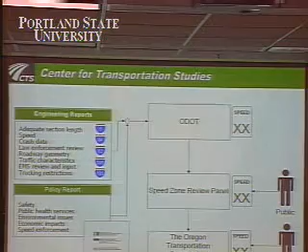So the law that the legislature passed, essentially from the time the law was passed till ODOT did the second rulemaking, there was no maximum speed on the interstate, so ODOT had to pass some temporary speed orders. So the process that they came up with was this: the department was going to do the engineering investigations of the sections of the highway.

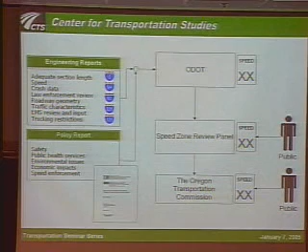So they would look at the crash performance, they would measure the existing speeds of vehicles on the roadway, they would get input from law enforcement. They divided up the interstates into about 40 sections of varying lengths, depending on consistent geometry. They would get input from law enforcement, from emergency services, and they would compile reports about each section.

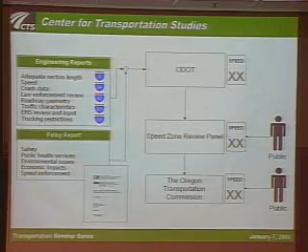And what they felt they couldn't do on a section-by-section basis was write an overall system impact of what would happen to the crash experience and the safety impact. So would crashes increase? Would fatalities increase? What would be the impacts to the public health system? Are there any environmental issues associated with raising the speed? Are there travel time benefits? And is there adequate enforcement from the Oregon State Police to enforce a higher speed?

So what they decided to do was require a policy report, and that's where PSU came in. PSU teamed with Oregon Health and Science University and a local transportation engineering consultant, Kittelson & Associates, to produce this policy report, a system-wide impact. So up here in the first box, ODOT would take those two reports. They would make a recommendation on what the speed should be on each section.

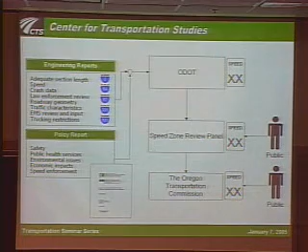They would present that to a panel called the Speed Zone Review Panel, which has representatives of cities, counties, ODOT, and a citizen member. They would review that, taking into account the engineering report, the policy report and ODOT's recommendations, and make a final recommendation to the Oregon Transportation Commission, which is appointed by the governor, and they would make the final rule on what the speed should be. So that's what the process was, and now I'll walk you through what our report found.

So over the holidays, I was reading Portland Monthly magazine, and buried at the bottom of some page were some historical statutes in the city of Portland. An early Portland speed limit is nobody should ride their horse, mule, or beasts of burden at any speed greater than 6 miles an hour. And this was in 1868. So this shows that in transportation, speed limits have always been of interest to people, limiting the speed of travel as a trade-off between efficiency, mobility, and safety.

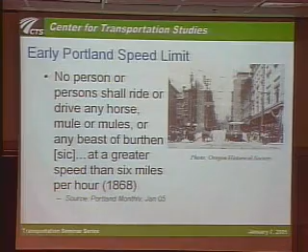So just historical context for interstate speeds: most all speed limits are set by the local government agency that operates the roadway. The federal government has only gotten involved twice, once in World War II as an emergency measure, and second in a period from 1974 to 1995 where there was a national maximum speed limit brought on in 1974 by the energy crisis. So they imposed a 55-mile-an-hour maximum speed on all roadways, including interstates, and they linked that to federal highway funds.

So it's not quite as bad, and Matt Lasky will notice these images because he helped me make them and did the research on where all the speed limits were. But for light vehicles, Oregon is the only western state that still has a 65-mile-an-hour maximum speed limit. Washington and California both have 70. You see a big piece of the western United States with maximum speeds of 75 miles an hour. Down in the south at 70, and then the more populated Northeast and Iowa also have 65. So that's the current status as of September. I don't think anything has changed since then, but those are the maximum speeds on interstates.

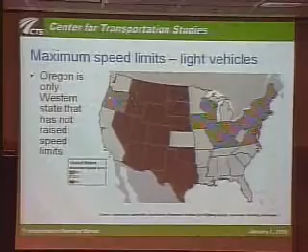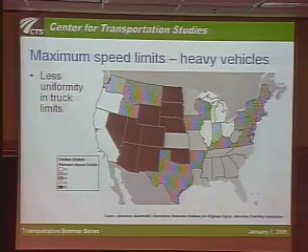There is less uniformity for truck speeds, and one of the key issues in the report was talking about what the safety impacts of having differential speeds for cars and trucks are. So just to let you know, some states impose lower maximum limits on trucks than they do on cars. And I'll have some more slides later.

So our report basically sought to answer these general questions, and I'll lay them out in how we came to some of our conclusions. One, will vehicle speeds increase if you change the signs from 65 to 70 miles an hour? Two, what could you expect in terms of safety and health impacts? Are different car and truck speed limits safe? That was a pretty significant debate. Are there any economic benefits to raising the speed limits? And what might you expect in terms of environmental impacts?

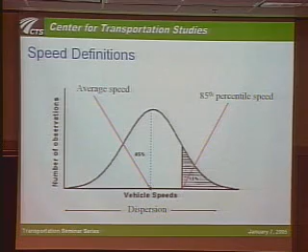So it's traditionally been a good speed to pick as a balance between enforcement and safety. The idea is that most drivers choose a safe and reasonable speed at which to operate most times, and that if you set your speed limit near the 85th percentile speed, most drivers will be in compliance with the speed limit, and you'll have a small proportion in excess of the posted speed limit. It makes it a little bit easier for enforcement and puts some trust in the driver selecting speeds.

So the first question is, will speeds increase? When you change the signs, you'd expect speeds to increase. But currently, even though the maximum posted speed is 65 miles an hour, the average speed is 67 miles an hour, and the 85th percentile speed on most of the rural interstate sections is 70 to 74 miles an hour. So people are well above the posted speeds already. So some of the arguments were, let's just change the signs because people are already traveling above that anyways, and we probably wouldn't expect to see any changes in speed.

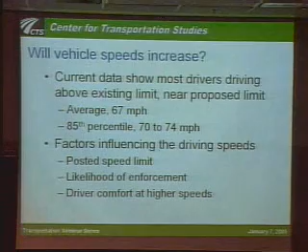But the factors influencing the speeds people choose to drive are, one, the posted speed limit, two, the likelihood of enforcement, and their level of comfort at higher speeds. So we looked at states that changed their speeds from 65 to 70, and this is only a snapshot of them, but in all cases, over time, speeds have continued to increase after the signs changed, even if speeds were above 65 miles an hour already. So all previous experience indicates that speeds are still going to increase when you change the signs.

Probably our most comparable state would be Washington. They have nearly double the trooper presence on their interstate highways. What this also doesn't show is that Oregon state troopers have responsibilities besides traffic enforcement. They do fish and wildlife. They do criminal enforcement. In Washington, Idaho and some other states, their duties are specifically traffic enforcement only. So if you took that into account, the Oregon numbers show even less of a presence. And you probably know from your practical experience driving Oregon's interstates that the trooper presence on the interstate system is not all that great.

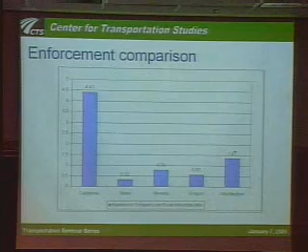So there were some other issues on whether, if you raise speeds on interstates, it would propagate to the rest of the system: will drivers become accustomed to driving at higher speeds, and would that propagate to the rest of the system and cause problems?

We looked at some of the research, and it's true that there is a driver speed adaptation if you drive at higher speeds. If you exit an interstate to another facility, probably for about 6 or 7 minutes, your perception of your speed is less than what it actually is. So there will be some spillover effect on adjacent roadways where people probably will drive a little bit faster.

And especially on roadways that aren't interstates, like US 26, that wasn't subject to change, or Oregon 22 out of Salem, that look like interstates, but the speed wouldn't be raised. People would likely drive those like the speed had been increased.

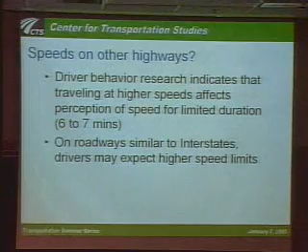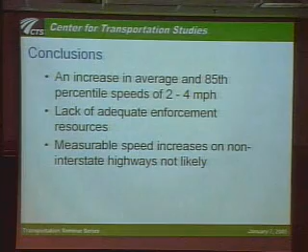So our conclusions were that the speeds would likely increase 2 to 4 miles an hour on average, that there was a lack of adequate enforcement resources, and that was recognized by many participants in the process. But we didn't expect a system-wide overall increase in vehicle speeds.

So the big question was what would be the impact on safety? Would there be a change in the number of crashes, in fatalities, and injuries? And it's a very difficult question to get at, even though there's been a lot of somewhat rigorous studies on the issue. It's still not very conclusive.

So you can look at it in 3 ways. 1, how speed physically influences crashes. 2, you can look at studies that have specifically looked at crash causation and see what impact speed has on that. And lastly, you can look at the observational studies of speed limit changes on crash frequency, of which there have been quite a number.

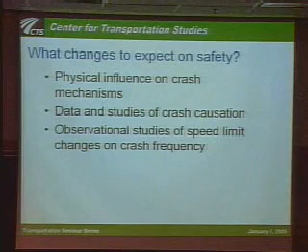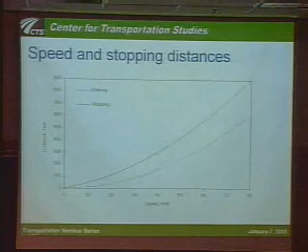So this graph shows the AASHTO design considerations for stopping distance. It's for wet pavements with some assumptions in perception reaction time. So not anything earth-shattering, but as speed increases, braking distance increases with the square of velocity. So an 8% increase in speed from 65 to 70 miles an hour would increase stopping distance by 13%. So it's not a linear relationship.

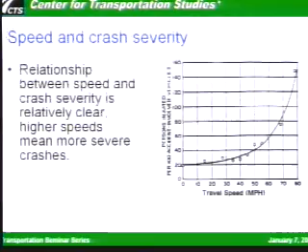And speed also has influence on your maneuvering. It takes away time to avoid obstacles or other collisions. So speed definitely does have an impact in those two things that would be involved in crashes. Also undisputable is that crashes at higher speeds are almost always more severe.

The relationship has been demonstrated in observational and empirical studies and also medical studies, that the higher vehicle speed before the point of impact almost always results in more severe collisions.

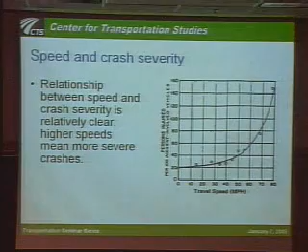So speed as a causal factor in crashes: looking at raw data sets, a lot of the focus is on fatal crashes just because the data for those crashes is typically more dependable, and there has been a police investigation of the crash, whereas for some of the other crashes, the data is either from citizens or there's not as much time spent on the investigation.

So NHTSA, which is the National Highway Traffic Safety Administration, compiles nationwide fatal accident statistics, and has 31% of Oregon fatal crashes having speed as a causal factor. ODOT has it a little higher, at 52%, and that's just due to different definitions of when speed was a causal factor. The NHTSA definition is a little bit more rigorous.

If you look at all crashes, there was a study done in the late 70s by Treat et al., called the Tri-Level Indiana Study. It's probably still referred to as one of the most comprehensive studies of crash causation mechanisms.

They looked at crashes in 3 levels. One, just looking at the crash records. One was a more in-depth team review, and a 3rd level with a complete field investigation with police officers, psychologists, engineers, a whole trained team of people to determine the causes of those crashes.

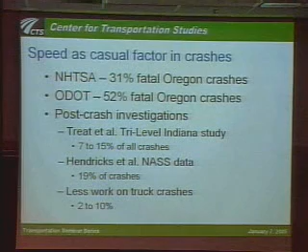So now, looking at the risk for an individual driver, what speed does to their chance of involvement in a crash. Most people, and maybe I'm guilty of it as well, I'm sure I am, exceed the speed limit. But it's hard for you to measure the incremental risk of your own exceeding the speed limit. But there have been quite a few studies that have looked at the increased risk of exceeding the average speed of traffic.

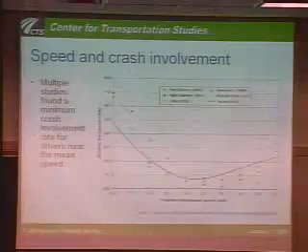But they all show the same, where here in the middle of the graph is the average speed of traffic, and your risk of involvement in a crash increases both on being slower than the average speed of traffic and on being above it. This gray line is a completely theoretical model by Hauer based on two-lane roadways and overtaking. So you can get the idea that if all vehicles are traveling at the same speed, there's less chance for interaction, so there's less chance for a crash.

So a lot of these higher points here on the left side, these studies didn't take turning vehicles out of their analysis. So that's why it looks like you're really worse off going much slower than the average speed of traffic, your risk goes way up. Some of these studies were flawed in the number of crashes they included.

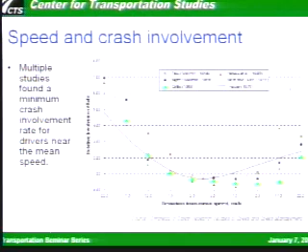So there's some debate about the quality of all of these studies, both ones that show increases and ones that show decreases. I left a few that showed some other significant decreases off because they were very poor. But almost all studies have shown an increase in the number of fatal crashes after speed changes.

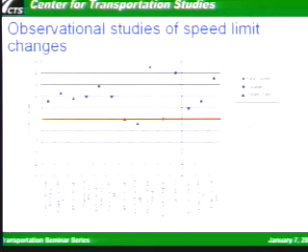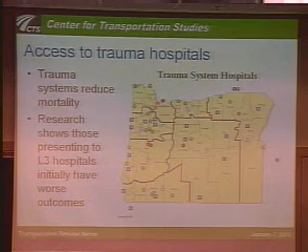And the research shows that if you present first to one of these lower level trauma hospitals, there's significant delays in getting you transported to a higher quality facility. And there are definitely significant health outcomes of presenting first to a lower level facility. So if you're in an interstate crash in some rural location and they transfer you to a lower level trauma facility, your outcomes are going to be worse than if you were transported to a level 1 facility. So much of the state is not covered by quick access to a high level trauma system.

So lastly, in this safety section, talking about the difference in truck and car limits. There's 2 states that have a 15-mile-an-hour difference between truck and car maximum speed limits. California and Michigan both have 55-mile-an-hour maximums for trucks and 70 for cars. And 6 states have 10-mile-an-hour differences, like Oregon 65-55 or 70-60, and a few have 5-mile-an-hour differences.

So what would be the benefits of having lower speed limits for trucks? So kind of 2 arguments for and against. One, the trucks are heavy. They require more stopping distance. They present significantly more energy in collisions. And if you looked at collisions between cars and trucks, the occupant of the passenger vehicle, like 80% of the time, is the one that sustains the injuries. So the rationale for lowering truck limits is to keep truck speeds slower.

And then the argument against that is that different truck speeds create conflicts in the traffic stream, so it introduces more opportunities for collisions. And then there's an economic cost to keeping your trucks at slower speeds. So the research wasn't really quite conclusive on this topic. The one thing it did point out is that they are effective at keeping truck speeds lower, but you need at least a 10-mile-an-hour difference to have any kind of effect on the observed speed of trucks.

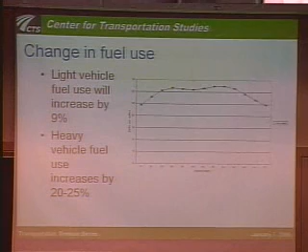So correspondingly, there'd be an increase in emissions, and these are from the EPA's Mobile 6 model, is that right? So these are speed correction factors. So Professor Dill made an estimate that for light vehicles, if the speed was changed, there'd be a 5% increase in emissions, and a more significant increase for trucks in terms of NOx and carbon monoxide. They really weren't looking at increases in the urban area, so the impacts to urban air quality probably would not have been that measurable. But most of the speed changes were proposed in rural areas.

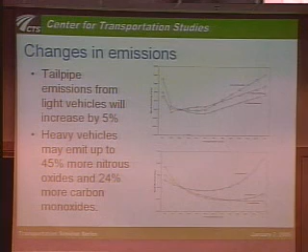So lastly, as part of the process, somebody wanted us to look at noise impacts. So we ran some numbers through a traffic noise model from the Federal Highway Administration. And in urban areas, truck speeds were not proposed to change, because they were probably not going to be raising any urban interstates, so the trucks would stay at 55. There's really no noise impact, and light vehicles weren't likely to change either. But in rural areas, there would have been a slight increase in the impacted noise area of about 80 feet.

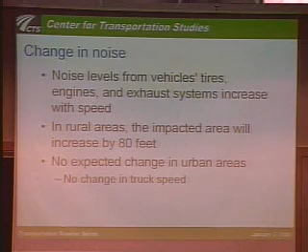So there were some caveats to our overall study. One, we didn't look at the effects of the aging population, who may not be comfortable driving at higher speeds and would also be more likely to be injured in higher speed crashes. Even though we predicted an increase in the number of crashes, we didn't look at the additional delay that might be imposed on the system by those crashes.

So our conclusions then: the relationship between speed, travel time, fuel use, and pollution, those are relatively easy and direct. They're one-to-one relationships. We were less confident in our speed and safety predictions, because the relationship is a little less clear there. And travel time was really the only positive benefit that we found in the report.